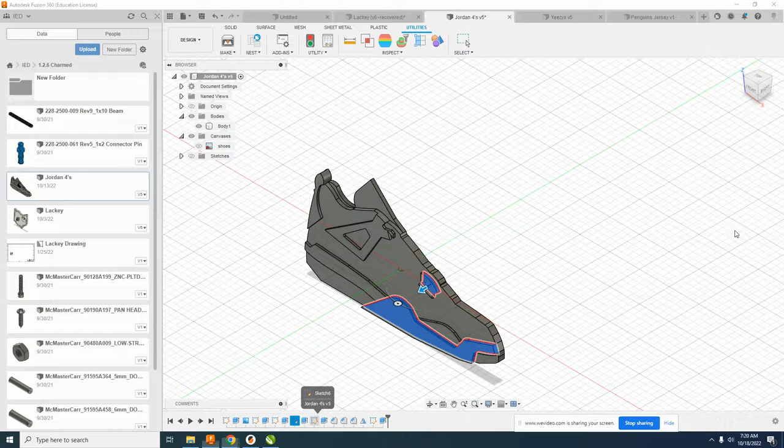If you have about 5 or 6 bodies, that means that when you have been going to your extrusions, so let's say I did this extrusion, you see how I did join? Some of you might have accidentally done new body. So if that's the case, you need to go back and you need to edit your extrusions so that they are joins, so that at the end you are left with one body.

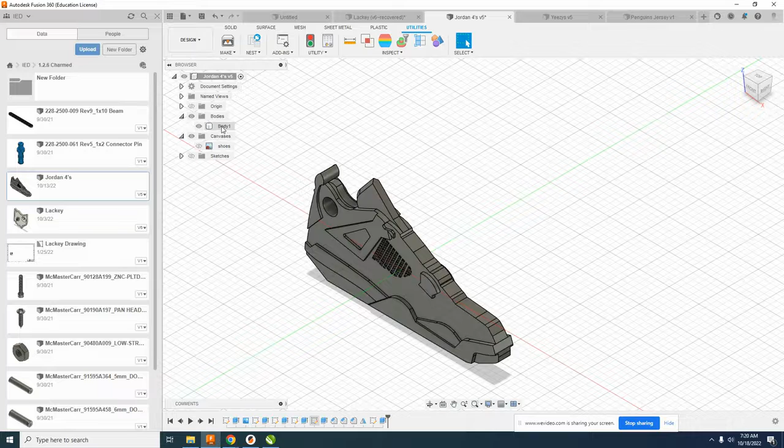Then you will go to utilities and you will go to 3D print. Now you're over here. This defaults to check. So you want to uncheck 3D print utility. You want to highlight your entire part. If for some reason it doesn't highlight, you can go over here and click body and highlight it. But basically, once you have that, you want to press OK.

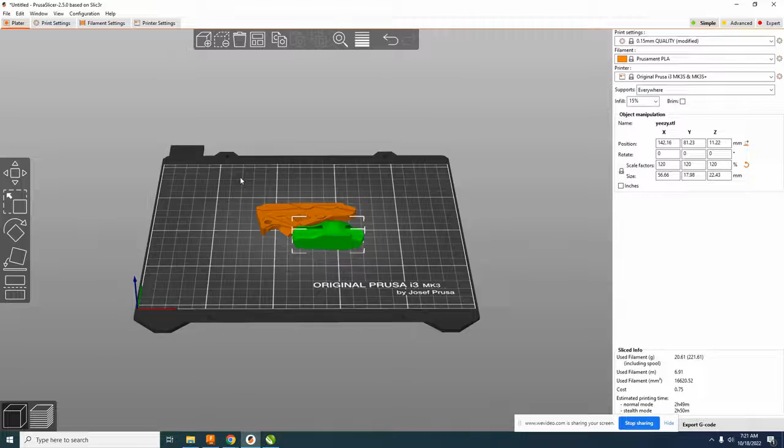And now this one doesn't really matter where we save it. You can save it to downloads, whatever. So we'll save it as Jordan 4. So then what you're going to do is you are going to go to Prusa. So hopefully you have that downloaded. If not, we can get that downloaded. And then you're going to go up to this plus button. You're going to find that, open it up, place it in here.

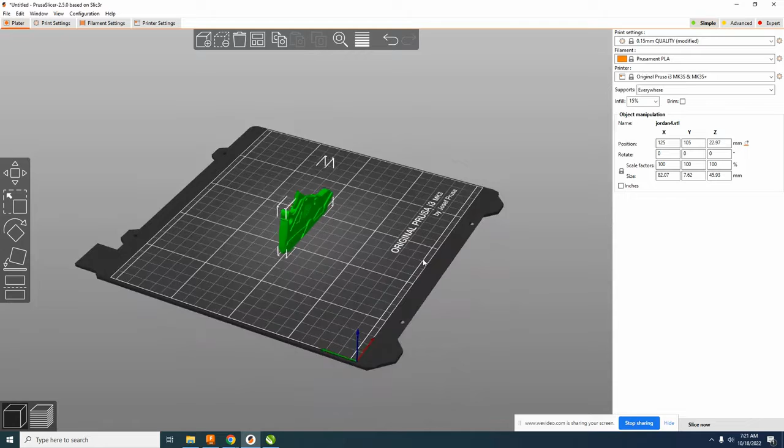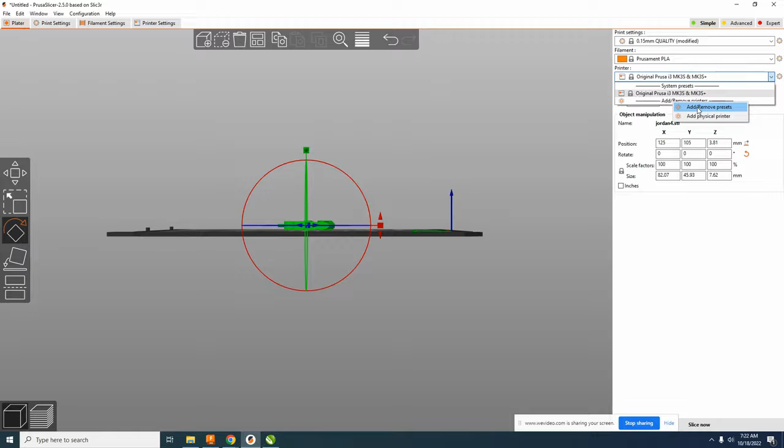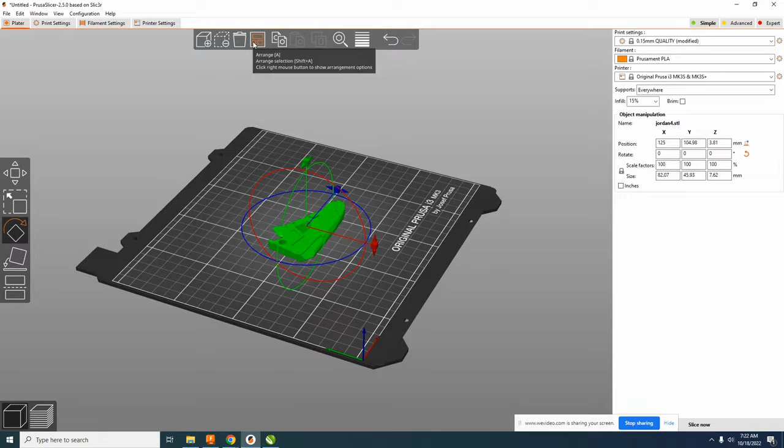And also make sure that you are in the original Prusa. If for some reason you're not in the original Prusa, you can go here and add remove presets. Don't worry about installing a new item, and then basically make sure you are doing this one, original Prusa MK3S, 0.4 nozzle, and then click finish. Okay, so once you have that, I usually go up here afterwards and hit arrange so that I know where it is.

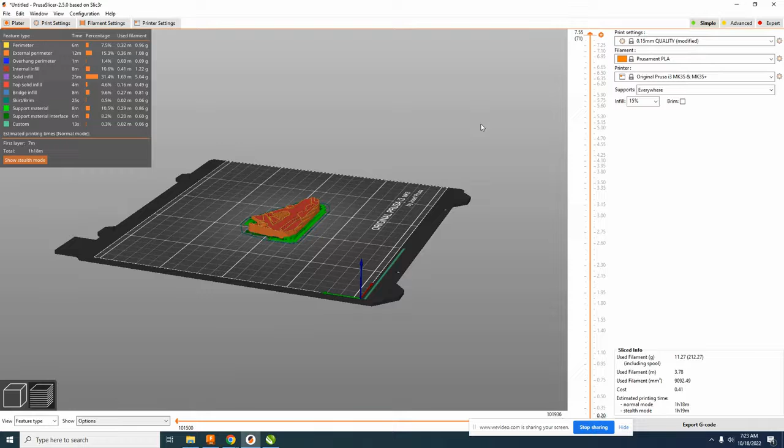All right, so now supports everywhere, original Prusa. We're gonna hit slice now. Do you see how it added supports right there? So it's going to print and go up like that. So that technically is done. And if you have an open printer, we would then be able to grab an SD card, export to G code, and do all of the above.

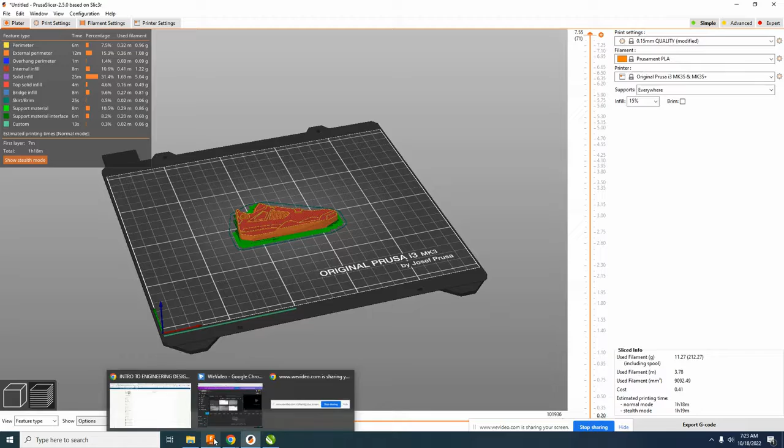But what I'm going to have you do, because I want to print these in batches, 1, 2, 3, 4, 5, 6, 7, 8, it's going to be easier to do this. So we're going to go back to Fusion. And we're just going to select. Okay, so see where we're saving, and instead of just randomly saving, we are going to save to South-Student, IED 2023, the period that you're in, and there'll be a folder for your backpack charm. Okay, so we'll double click on that,

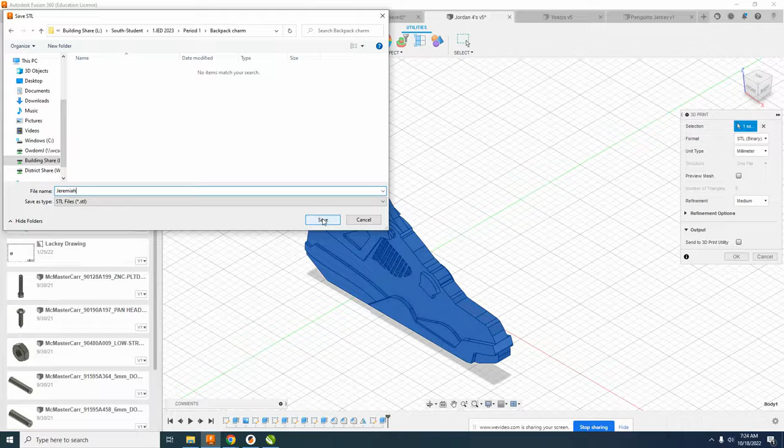and you should save it as basically the person that you are making it for. So for example, I'm making this for Jeremiah, so I would put it as Jeremiah. Okay, so you should be able to see here in building share South student, IED 2023, period 1, backpack charm, it should say .stl.